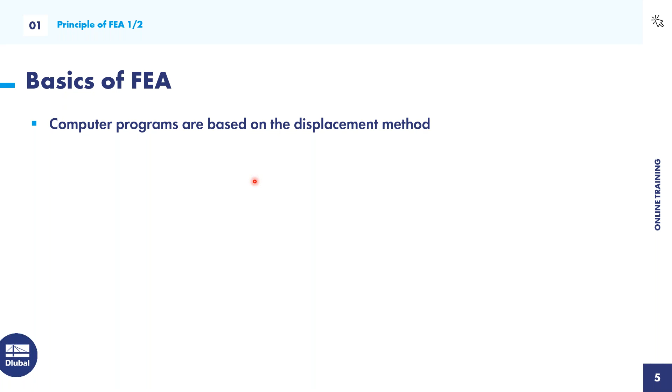But computer programs use the displacement method because it's easier to implement, more convenient, and easier to calculate for the programs.

If you look at any complex structures, it is normal that the analytical solution is not so easy. It's hardly possible to calculate or find any analytical solution. This is also the reason why real structures are decomposed into a mesh of finite interconnected elements.

At each element continuum and at each node, the properties, especially the degrees of freedom like deformation or restraints, are described at the nodes - the properties of the element continuum.

Normally the finite element analysis is just a numerical approximation of an exact solution, so the mechanical behavior is described by approximation sets. The whole process of decomposing a structure into finite elements is called discretization. Remember that, this is very important: discretization is the decomposition of a structure into finite elements.

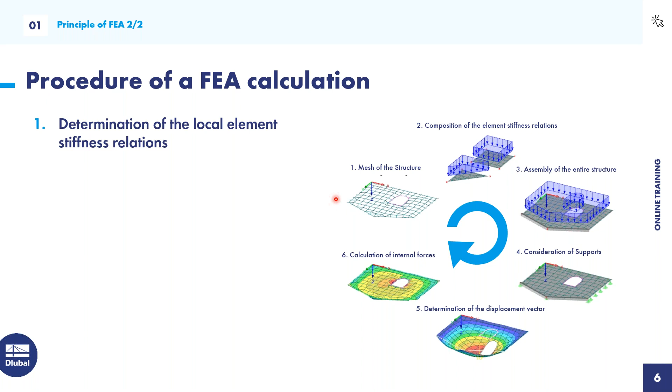So what is the general procedure of an FEA calculation? On the right side, you can see this image with the basic steps. First of all, we do the discretization - we determine the local stiffness relations, the local element stiffness matrices at each node. So we mesh the structure, we do the discretization. Then we transform it to the global coordinate system and assemble the entire structure.

Then we also have to consider different supports in order for the structure to be stable. So the boundary conditions are very important to define, and normally the boundary conditions are the support conditions.

As we said before, the displacement method is the method implemented in computer programs. So first we determine the displacement vector, and after that the internal forces like bending moment, shear forces, normal forces, tensions, stresses, strains, and so on. This is also called the solution of the equation system, and then we do the determination of support forces and internal forces.

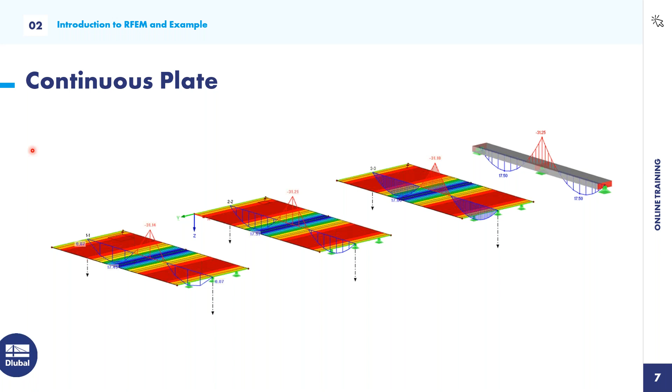Therefore, I have also prepared one question for you, because I want to know how good your knowledge is in using RFEM.

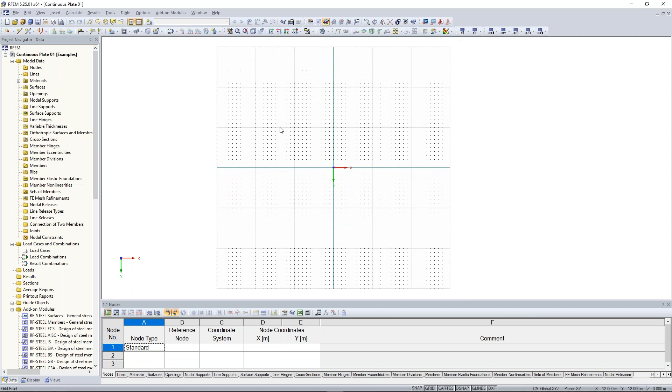Good. So I will explain you now the whole user interface of RFEM. You don't have to do it now with me because I will open another project where I can explain the whole user interface on an already existing project. So just watch and maybe remark some information.

So I will open this one. Fine, very good. I will activate here in the status bar the snap and grid function.

Chronologically, the first step is that we have here the menu bar, and here we have the possibility to do almost every kind of workflow function of RFEM. The basic file, you can save, open, import, export, insert blocks, save it in the project manager, print, and so on. I think this is known from other software applications.

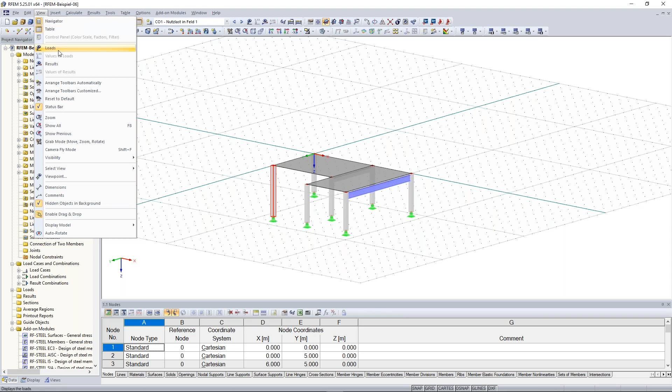Also, you find here additional information concerning the model data, loads, load cases, and combinations. In the view, you can click on loads and the loads will appear, or clicking on results—since we don't have any results at the moment—the program asks if I want to have the results, and I click yes. Now I see also the results, and some other kind of things like comments, dimensions, and so on.

So with this insert tab, you can insert almost every object, from model data to loads, and also to load cases and combinations.

The general step in RFEM is that at first you model all kinds of necessary objects. So you define materials, cross sections, and then you can also model members, hinges, and finally nodal supports. Then you create your load cases and combinations, then your loads, and then you can calculate it. After that you have the possibility to watch the internal forces and the results. This is the basic workflow in RFEM for calculating projects or doing structural analysis.

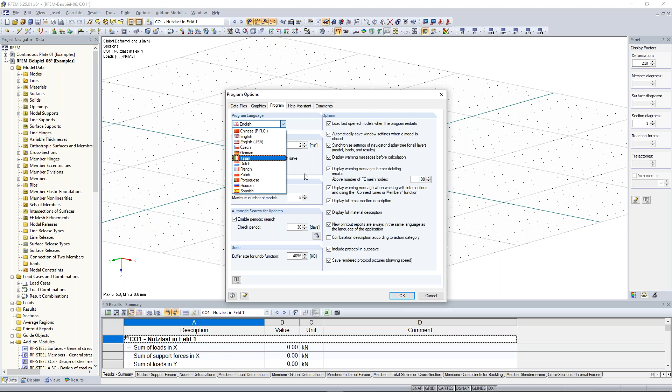You may also notice I use a white background here. For those opening RFEM for the first time, you can change your background. In the options, in the configuration manager, you can change the background to black or white. At the moment I use white, but when I double click on black background, it changes to black. You can also adjust a green or red background—just use the display properties and other colors to adapt your background.

Good. I think that's everything for the menu bar.

Under the menu bar we find the symbol bar. The symbols enable a fast way to insert objects, views, or edits. So if I want to create a new node, I click on new node, click somewhere, and I get new nodes. The same with lines—I click here and then here. I think this is pretty clear.

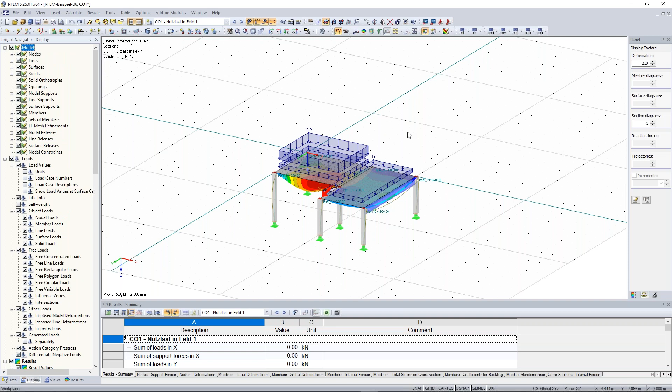Okay, let's jump to the next navigator—this is the display navigator. In this case I have the loads activated at the moment. If I don't want to see them, no problem—just click on loads and all loads disappear. You can do the same on the symbol bar with show loads.

You can also make certain models disappear, like the nodal supports—just click on nodal supports and the supports disappear, but only in visibility. The same goes for results and the FE mesh: when I don't want to see the FE mesh at the moment, I click on that and it's hidden.

Good, so far to the display navigator. Let's continue with the view navigator. Sorry for my bad spelling.

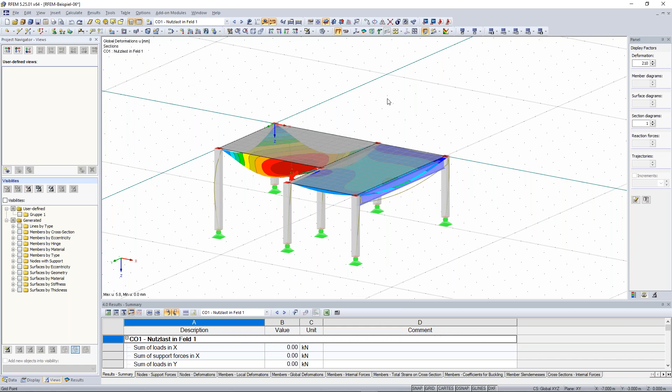So if you like a certain view, for example this one, quite nice, then you can create a user-defined view. Just click here on create new user-defined view, favorite. When you rotate or move away from the model and want your favorite view again, just click on favorite and it jumps back to it. This is a big advantage, especially when working with more detailed or complex structures or projects. Then you can use these user-defined views.

Also with the help of visibilities, you can filter things better. For example, I just want to see all cross sections here of this concrete. No problem. Go to members by cross section, open this tree, and activate the rectangle 300 by 300. Only this kind of cross section is visible and also possible to modify.

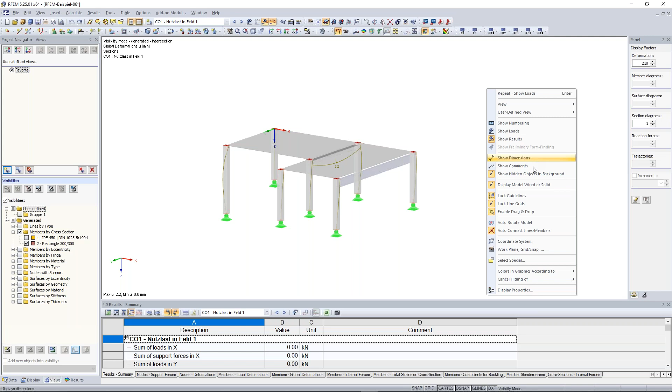You can also right click and this menu appears, then click here on display model, show hidden objects in the background, so the surfaces here will disappear and it will look like that.

Undoing this visibility mode, you can click here on visibility by select objects, click on the arrow, and then cancel visibility mode. You can do the same thing here too.

Now the last navigator, this is the result navigator. Here I can see results like deformations, stresses, internal forces of members, and also support reactions. At the moment I see the global deformation of the whole structure, both from the members and from the surfaces.

If I just want to look at the members, I click here on members and choose the right internal force. In this case I choose the normal force, and there I can see the compression forces in the concrete columns.

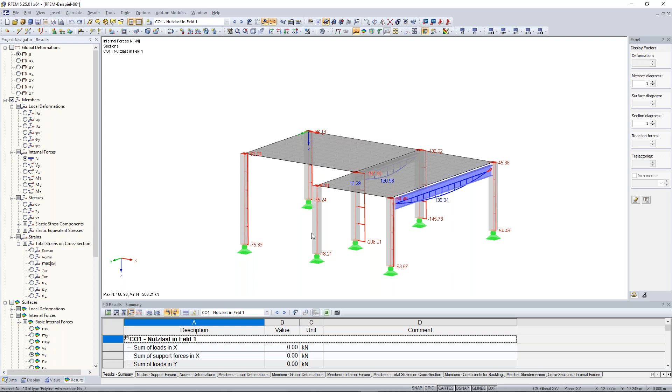Also here, surfaces, internal forces of the surface, mx, my, and so on. And also the support reactions with the components px, py, pz, and so on.

Yeah, good, so much to the navigator. Now...

On the bottom of our user interface we have the tables. With the tables we have the possibility to view all information, and also to insert and create new information or objects. For example, I can create here a new node.

So I click here on standard. Reference node is my node here, and I enter the coordinates. x is 14, y is 0, and z is 3. And I see here this created node.

This is also possible for almost all other kinds of objects like lines, materials, surfaces, solids, and so on. You can jump to the next tables by clicking the next icons. Now I am at the load cases, nodal loads, or also member loads, line loads, surface loads, results, and so on.

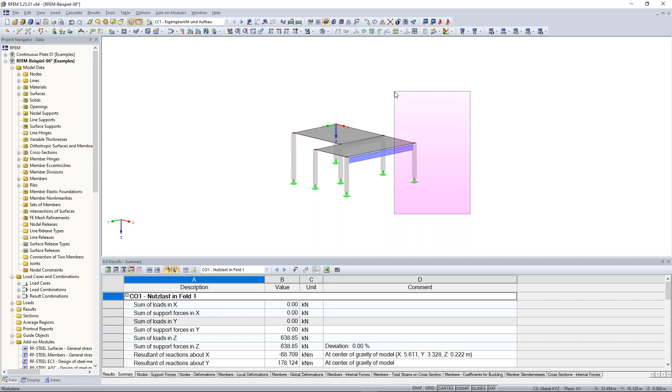Otherwise, when you draw the selection window from the right to the left corner, then everything is selected which is surrounded by this selection window. So in this case it would be the column on the right side, but also the steel girder and the concrete surface. This is important to know.

And with the mouse wheel you can also zoom in and zoom out, I think this is clear. When you press the control key on your keyboard and also press the mouse wheel, then you can rotate this structure. When you press the shift key and also the mouse wheel, then you can zoom in and out.

We offer these possibilities also with this icon here in the icon bar: move, zoom, rotate, and so on. There you have the same possibilities, and so on.

Good, I think this was everything. Bastian, have I forgotten something, or do you want to add something? I think you haven't forgotten anything, and there are also no questions, so I think you can move on.

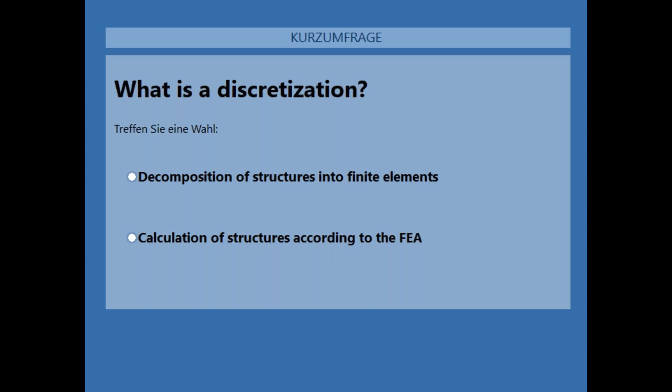Good, most of you have already answered this question, and most of you paid attention to that chapter concerning the general basics of FEA. So, discretization, what is that? It's a decomposition of structures into finite elements.

Very, very good. So let's start our example. Jump back to the continuous plate. Let's start modeling it.

First of all, I create a new surface. In the symbol bar, I find this icon, new rectangular surface. By clicking on the arrow, I find also other kinds of surfaces, but for me it's good to use this rectangle one. I click on that, and a new window opens.

The next thing I'm gonna do is create the material. In this case, I use the Eurocode concrete C30/37 material. For those who don't have this material here, no problem — edit the material by clicking this icon here, and open the material library.

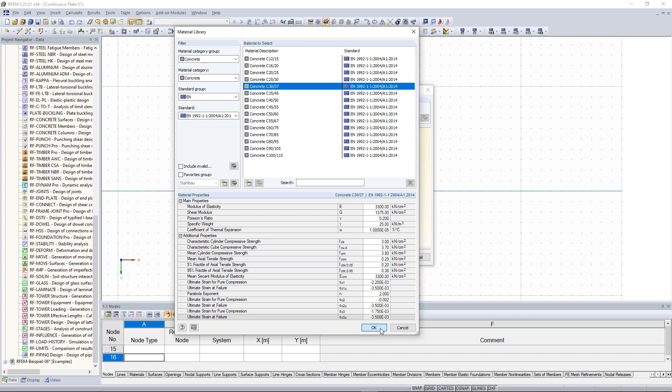I click on OK. Important note is that we set the Poisson's ratio to 0, because we want to get, for that example, results which should be constant over the whole plate thickness — so no shear deformation in the plate thickness. I click on OK.

And the thickness of our concrete surface is 300 millimeters. So I click on OK.

Now I draw and activate here the snap function. I draw this rectangle from my local global coordinate system, 10 meters to the right side and 5 meters high. Good, now right click, and I close this way of inserting a new surface.

So now I see here the rectangular surface, and now I can copy it or create a new one. Now one tip, please remember this, it helps me a lot: by clicking the enter or return key on your keyboard, you do the same task again.

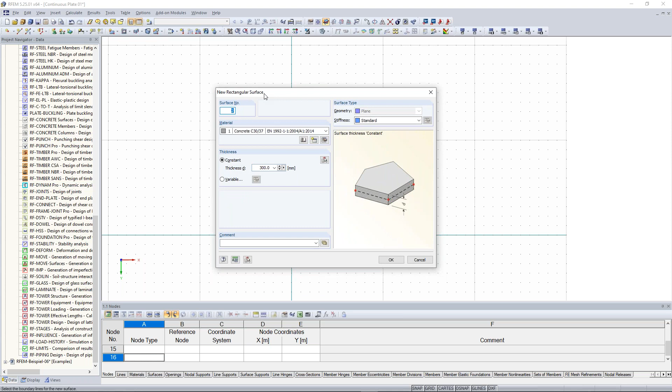So our task was the creation of this new rectangular surface. When I click the return key or the enter key, it opens this new rectangular surface window again, and I click on OK again, creating the same surface again with the same geometry.

And now I do it again here, at a distance of 5 meters from the right upper corner node, and we move this 10 meters downwards. So I select all 3 plates, snap here near this middle surface, near the left bottom corner, and move this to my global coordinate system.

To get better results, it is useful to use the same thickness of the plate and also refer it on a 1 meter beam. So we create here a new cross section for the member start.

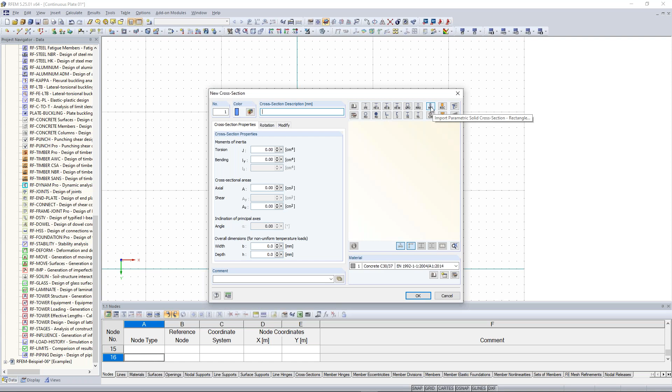I click here the import parametric solid cross section, a rectangle. The width of my cross section is 1000 millimeters, and the height is the same as the thickness of my plate, 300 millimeters. The material is the same, concrete C30/37.

I click on OK, and it looks like that. Here I get the cross-section description, also with the cross-section properties, like the moments of inertia, bending, torsion, and so on. I click on OK.

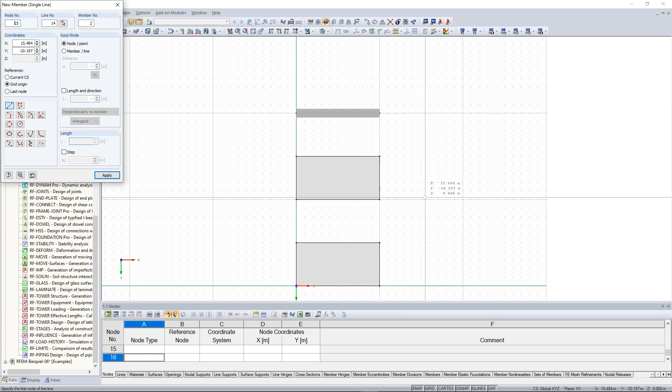And now the member start has the cross-section of this one, and the member end also has the same. I click on OK, and now I draw it from left to the right, also 10 meters long, and close it with a right click.

Now I can rotate it a little bit, and now I can see it from a 3D perspective.

So the next thing is we want to have a continuous beam and also continuous plate. Therefore, I have to create lines in the middle and also nodes here in order to create supports afterwards. So how can we do that?

We can divide this line into 2 lines, and then we get the middle node. And then with reference to the middle node, we can create the next line perpendicular to the other end.

So you can also see here the line, the red line, and also here the arrow. The arrow shows from the left to the right side, and this symbolizes that the starting node is on the left side and the end node on the right side.

With right click on one of the line nodes, I can also show the local axis system, and this is similar to the line direction. So the local x-axis of every line or every member is the same as the line direction. You see it points to the same direction, to the right.

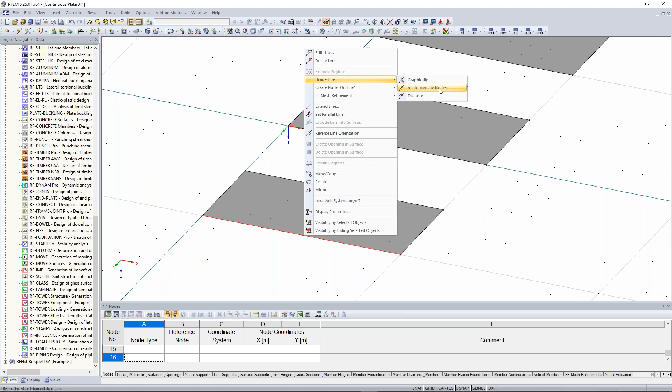I click here on polyline with a right click, and I click on divide line. I just want to have a middle node, so I can divide it into n intermediate nodes. When I click here 1, it will be divided into 2 parts. When I enter 2, into 3 parts, 3 into 4 parts, and so on.

So I click on 1, and I see this node, and these 2 lines are divided. Next thing is that we create this line perpendicular to the next one.

So click here on new line and draw this line from there to there, and double right click, and we can close this.

Now it comes to my favorite way of creation of objects, and this is the copy via drag and drop. We can easily copy this line by drag and drop.

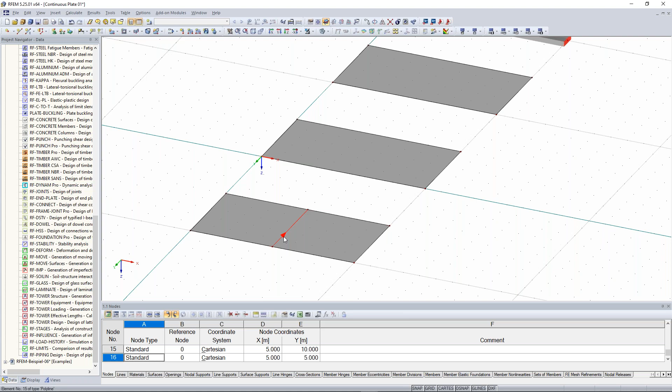Just click on that line, press the Control key on your keyboard, and now the left mouse, click and hold and put it to the other surface. And we do the same thing for the other one.

Good. Now let's divide this member here. Press right click, divide member. Now you can do it by distance or graphically. I decide to do it by distance.

And now it's also interesting how we can do that. We want to divide it exactly in the middle. So we can choose 50% as relation, or the absolute value, and it will start from the member start or from the member end.

And now here you can see the arrow, and this arrow shows from the left to the right side. And when I want to have a division 3 meters from the start, I have to enter 3 meters, and the member end will be calculated automatically.

The same thing with member end. If I want to go from the right side, so from the member end, press 6 meters, the member start will be resulted automatically. But in our case, 50%, because we want to divide it exactly in the middle.

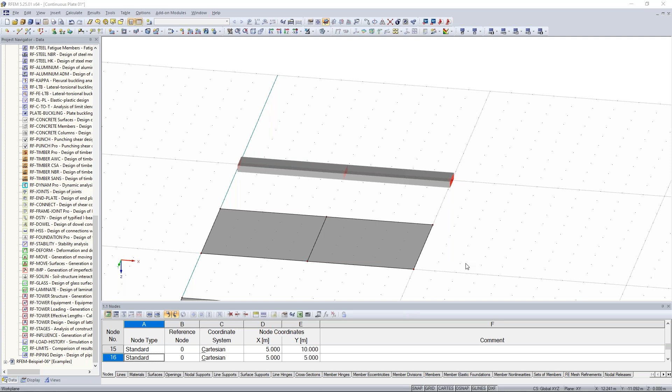I think what you can do is show us again how you can edit the cross section, for example, of the beam, and yeah, guess that would be nice to see again.

Okay, of course. So there are different ways to do it. You can do it with the help of the data navigator. Here you have the cross sections. Open this cross section, and by right click on this rectangle, you can edit this cross section.

Or if you want to create a complete new one, no problem. Just click on any other cross sections, like for example IPE profile, choose one of the IPE profiles, and click OK, and you'll have a new cross section. Yeah, this is one way of doing this.

Or you choose here the whole member by selecting this. Click right click, member, and edit. Then you can modify your member by editing the cross section for the member start, or create a new one. It's the same procedure like here with the data navigator.

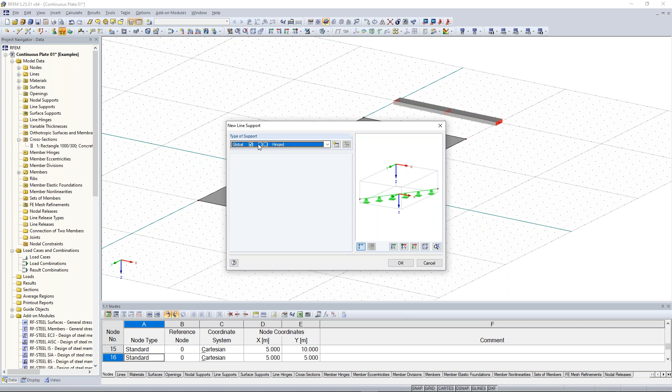Good, I would continue. Now let's do some supports. It's very easy. We have line supports for surfaces and lines, and also nodal supports like for this kind of members. So we create now line supports. We choose here this hinged support. I click on OK.

Now I draw, and this is the big advantage of RFEM: I can choose and select several objects at once. So I rotate my interface a little bit, and now I draw a selection window from the right to the left side in order to get all three middle lines here. And I do the same thing with the other surfaces.

Good, now let's come to the member. Here we do two different kinds of nodal supports. The first one is a new type of nodal support. So I click on new type of nodal support, and now let's look at this definition of support conditions.

So if I activate or check one condition, like UZ, then I deactivate the deformation of UZ, so no deformation in this direction is possible. Therefore there will be some forces, and the same also with restraints.

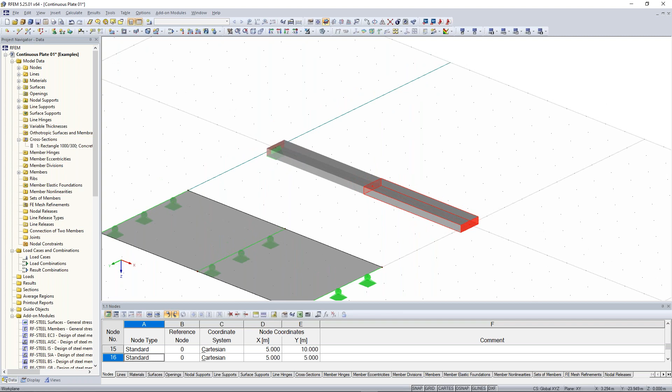Good. Now click on OK. Draw a selection window for just the first node on the left side. And for the other two nodes, you can draw also a selection window. It's no problem that the member is also selected, because we want to create an object just for nodes, and the program recognizes it.

So click here on New Nodal Support, and now we can choose the normal hinged support. Because we have already selected the nodes, the nodes appear here also in this box. Click on OK, and the two supports were created.

Now, the next step is the creation of loads. Before we add some loads, we have to create load cases. Click here on New Load Case in the symbol bar. You can also do it here: load cases, combinations, new load case. Same procedure—as you can see, we have more possibilities to insert or create something. So, new load case.

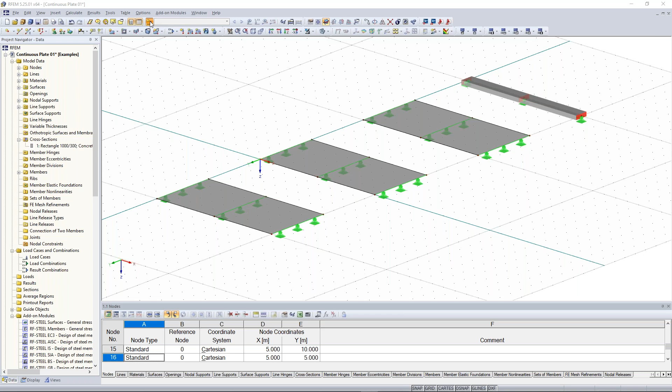For our simple example, we insert the name or description 'test load' and deactivate the self-weight, in order to compare the results better. Then I click OK.

And I will create surface loads here and member loads here. So again, new surface load here in the symbol bar. Here I can set up some load types, load direction, uniform load distribution, linear in X, linear in Y, and so on.

I add here the magnitude of 10 kilonewton per square meter. Maybe the load direction is greyed out, because we use the model type 2D, so there we have some restrictions concerning the load direction. I click OK, and I add the loads on the surfaces.

Good, and now let's do the same for the continuous member. One big mistake, especially for RFEM beginners, is to also use line loads for members. But we have to use member loads for members. Line loads are used for additional loads on lines.

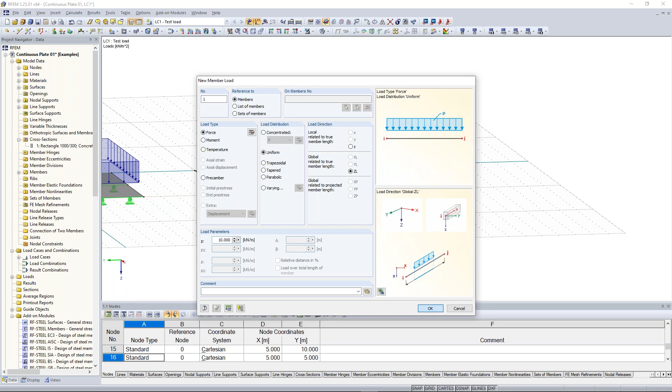Yeah, that for members I use member loads. So I click here on member loads, enter the same load parameter, 10 kilonewton per meter. Click on OK, and I choose both members.

Good. And the display of the member load, I can do it a little bit smaller, so I decrease the size here. So now it looks good. Nice.

So the next part is the creation of the refinement, so every surface gets a different mesh size. In order to do that, I create here FE mesh refinements. Normally, the whole settings of the FE meshes are managed here at the Calculate tab under FE mesh settings.

Here you set the general target length of the finite elements. If I would do nothing, every surface would get a finite element length of 0.5 meter. But in this case, I want to have for every surface another one. So I do here FE mesh refinement, right click, new FE mesh refinement.

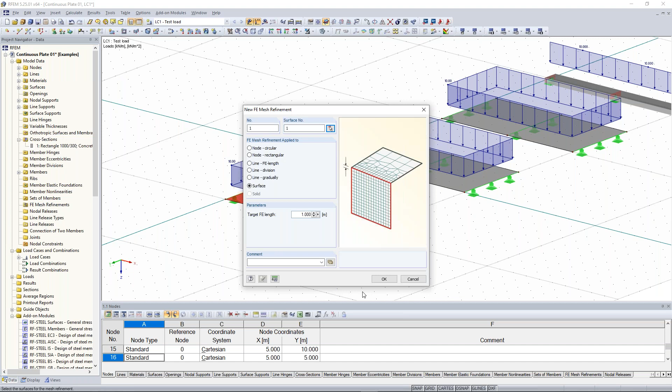Now let's do the same thing again. Right click here in the data navigator, new FE mesh refinement, 0.5 here at the target FE length, and the surface is this one. I click on OK, on OK again.

And now here we do a different way of insert. Right click, FE mesh refinement, new. Because we have already selected it, it shows me here that we have this third surface. We create a new FE mesh refinement, 0.1. Here we see the FE mesh refinement with this quadratic object symbol.

Yeah, and now I would suppose that we calculate it. And before we do it, in order to compare the results better to each other, it would be quite helpful if we have sections here at the surfaces. In order to do that, here in the data navigator, we have also the possibility to create sections.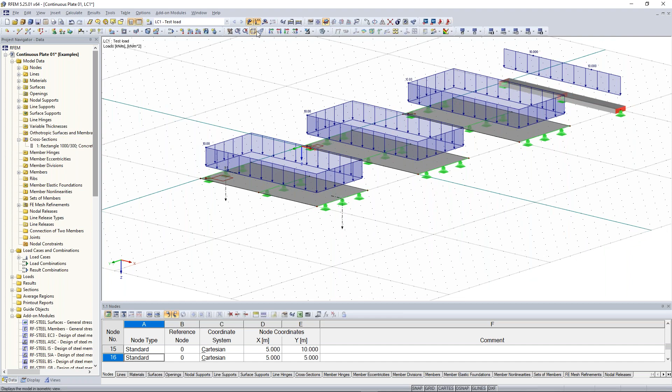Maybe I can make the loads disappear here by clicking not to show the loads. And now also one of my favorite ways of creating things in RFEM is drag and drop.

So press Ctrl key, left mouse click, and copy it from one side to the other, so from one surface to the other surface.

So, modify or edit here the section name and choose here the correct surface. And let's do here this thing again, choose here also the correct surface, and click on OK.

Good, now I think we have everything we need for our calculation. The next thing is starting the calculation.

Therefore, you can use here calculate all in the symbol bar, or also here calculate RFEM results only, or to calculate, and there you can choose your load case or your load combinations and so on. The topic of defining load combinations and so on will be part of the next chapters, the next parts of our student series of online training. So I click here on calculate all.

And the first thing we're going to see are the deformations. So here the deformation, and also a very nice thing is when I change here the display model to the wireframe display model, I see here also the size of the FE meshes. As we said before, here in this first surface, we have a FE mesh size of 1 meter, 0.5, and 0.1.

Good. In order to see the results here at the beam, we have to activate members, and we see here the bending moments: field moment, support moment, also the shear forces and so on. But I think this is clear.

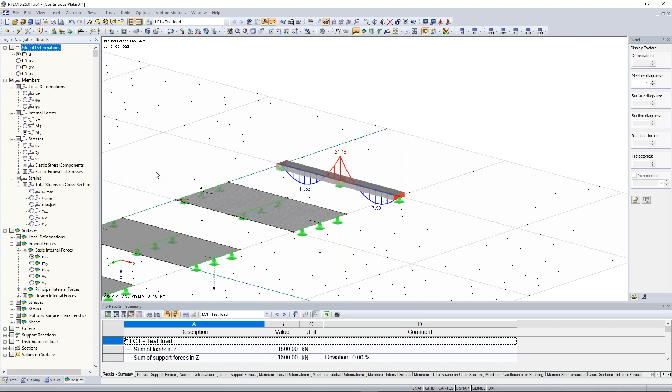More interesting are maybe the sections of the surfaces in order to see the bending moments of the surfaces. Therefore, I activate here in the result navigator sections, and I want to see the bending moments. So I have to activate here surfaces and choose here MX.

One hint to the basic internal forces of these surfaces. You can see here also the local axis of every surface.

At the moment, I deactivate the results just to show what I want to explain. Here we see the local axis of this surface, the x-axis and the y-axis. The x-axis points to the global x-axis, and the local y-axis also to the global y-axis there.

So now, important point: the basic internal forces like MX and MY are oriented in the same direction here. MX is along the local x-axis of this surface, and the same for MY.

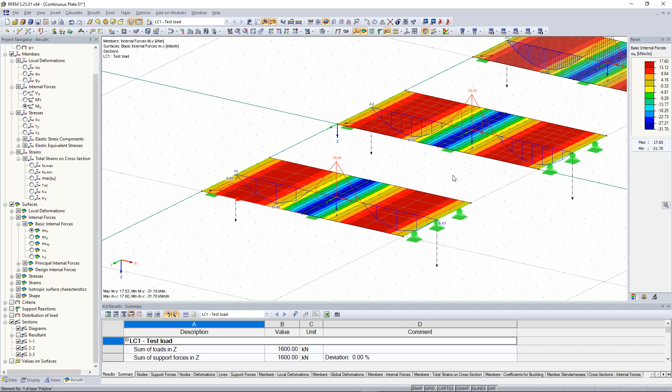Good. So let's watch the results together. Here we can see the results are pretty okay, especially this one with the fine mesh. There we have the same support moment like here with this member. This looks pretty good.

In general, the results are quite good, especially the extreme results, like here the field and the support moment.

But now this will be very important: the length of this FE mesh. Here you see it's linear, and normally it's everywhere linear, but here we have in 1 meter just one FE element, and here we have 10 FE elements in 1 meter.

So the approximation of the results will be very incorrect here, I would say, or not really exact, and here it's more exact. You see it at the distribution of the moment section. It isn't really exact in comparison to the one where we have really fine FE mesh sizes.

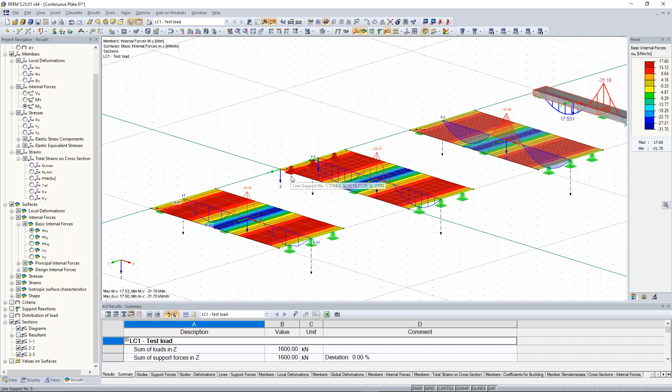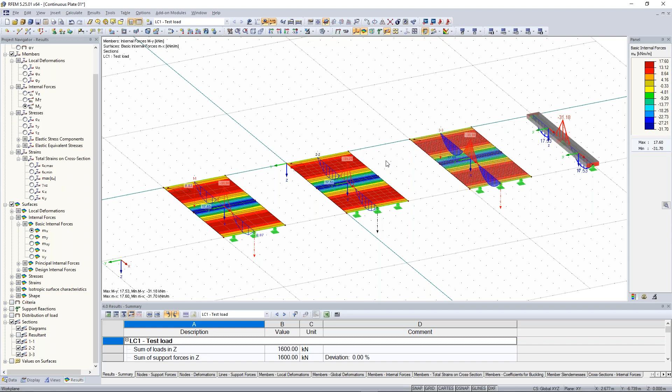So you have to know it. I would suggest you make that FE mesh quite fine, but not too fine, because when you have too fine FE meshes, then the calculation will take very long. So you have to find the right proportion, the right FE mesh sizes, in order to have correct and exact values, but also consider the long calculation time of FE programs.

Now I see one question, and this question is: what is the suggested FE mesh size? I would recommend at least 4 up to 6 or 8 FE meshes in one surface.

So we have here from there to there, it's 5 meters. At least there should be, from one boundary condition to the other boundary condition, 5 up to 6 meshes, finite elements. So I would say this one is quite good, this one with the mesh size 0.5 meters. This one is very fine, and it is not so important to have such a fine FE mesh.

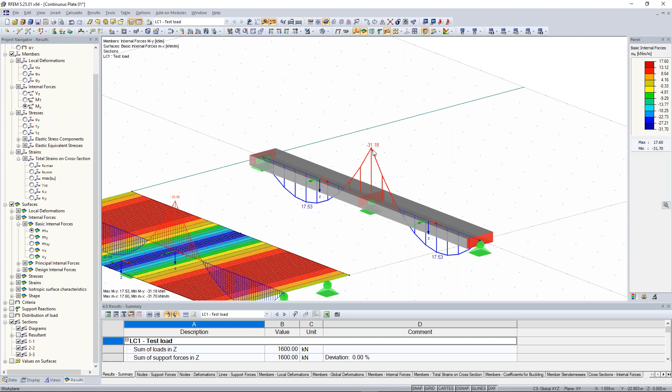Normally in your studies, you do hand calculations, which is pretty common, using tables or calculators. When you calculate the support moment of a two-field beam or continuous beam, you might get different values. Let's watch the results again. Normally you would get a support moment of 31.25 kilonewton meters, but in this case, just 31.18.

Why? It's due to the shear activation of members. So I go here to calculation parameters, and here you see the activation of shear stiffness of members. If I activate it, it considers additional shear forces and therefore also additional deformation, and you calculate it as not as stiff. In Germany, we would say schubweich. So with the activation of these cross-sectional areas AY and AZ, additional areas of cross-section.

This will be very interesting for the next chapter, because I have also prepared a PowerPoint for that. So I jump back to my PowerPoint.

Now I want to take a look at the plate theory. First of all, we try to relate it to the beam element. On one side we have the Bernoulli beam, on the other the Timoshenko beam. The Bernoulli beam says the cross-section remains plane and also remains perpendicular to the member axis, and we don't consider any shear deformation, so we have rigid shear stiffness. When you calculate something in your studies with tables, you calculate a Bernoulli beam.

But what is in most cases implemented in FEA programs is the Timoshenko beam, or also the other plate theory. But first let's take a look at the Timoshenko beam.

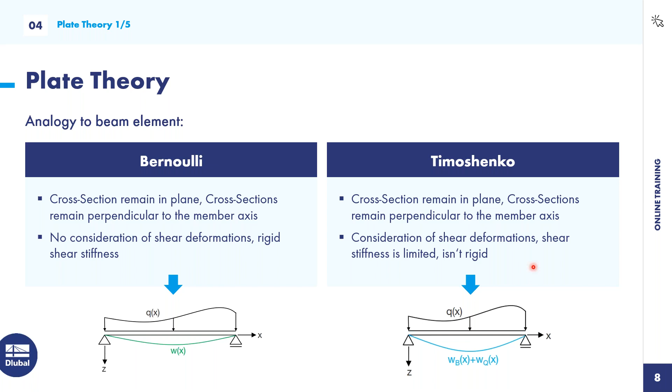The first condition is the same: the cross-section remains in plane and also remains perpendicular to the member axis. But here we consider shear deformations, so the shear stiffness is limited and not rigid anymore. Here it remains perpendicular to the axis, but we get an additional angle, so it won't be perpendicular anymore to the member axis. So additional deformation in this Timoshenko theory.

Now let's transfer the beam theory to the plate theory. The Bernoulli beam corresponds in plate theory to the Kirchhoff theory, and the Timoshenko beam to the Reissner-Mindlin theory. What are the conditions? We have a geometrically linear system, so small deformation, Hooke's law, cross-section remains flat with no warping, and also constant thickness, and we don't consider any shear deformations.

For Reissner-Mindlin, the four conditions are the same, but we consider shear deformations and also the transverse and lateral strain. What is that last one? When I take this kind of beam and tie it with a force, it will get a little bit longer. The part where it gets longer is called delta L, and also the cross-section becomes a little bit smaller. This effect is called the transverse or lateral strain. In German, we would say Querdehnungseffekt.

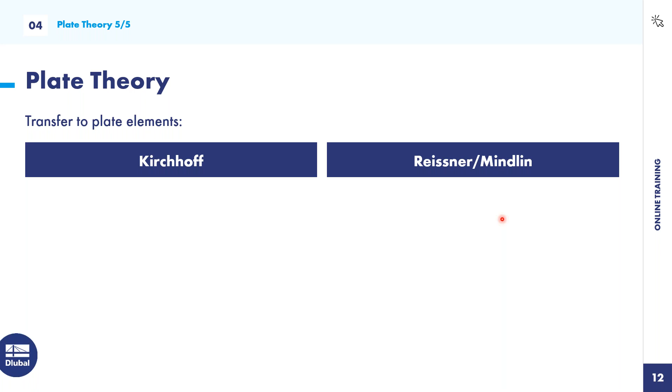So again, as a summary: Kirchhoff on the left side, Reissner-Mindlin on the right side. Kirchhoff is the same as the Bernoulli beam, and Reissner-Mindlin the same as the Timoshenko beam. At Kirchhoff, we don't consider any kind of shear deformations, and at Reissner-Mindlin, we consider shear deformations.

So what can we use Kirchhoff for? We can use Kirchhoff for the theory of thin plates, like normal concrete surfaces in story buildings or something like that. There we can get quite good results with the Kirchhoff theory. It's a simplified approach.

The Reissner-Mindlin theory, where we consider shear deformation, can be used for thick plates as well as thin plates. When you calculate according to Reissner-Mindlin, you get quite good results for both thin and thick plates, because it's a higher-value approach and we get more accurate shear forces. So my recommendation is please use Reissner-Mindlin, because then you get quite good results for almost every application area.

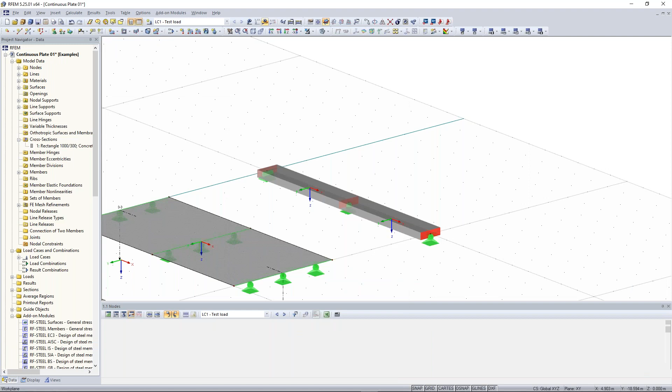I recalculate it, and I will get the support moment of my two-field beam of 31.25. This will also be the same when I calculate it according to tables, or when I do this by the force method or by hand. So keep that in mind.

Okay, Bastian, are there any questions? I don't think you missed something, we have no unanswered questions. So, well, feel free to ask. Oh wait, there's a new one. But I think it's better if I answer this by my own, because this doesn't have that much to do with the online training right now.

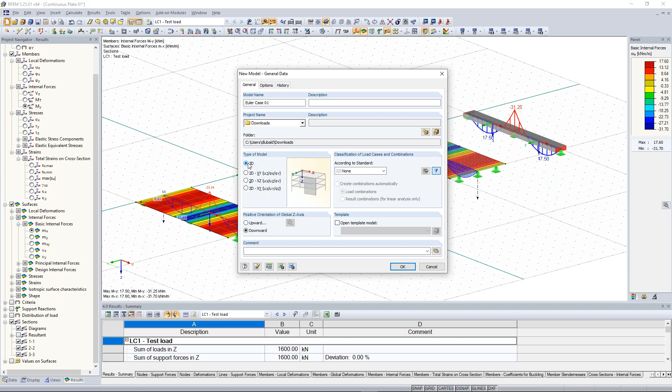Okay, so let's go ahead. I create a new file, a new model here in RFEM. In this case, I insert here Euler case 01, save it under downloads, and very important now, I want to consider a 3D model, because we do a stability analysis of this Euler beam, and there I want to consider both buckling directions. So therefore 3D, I click on OK.

What we're gonna do now is create this column. Therefore, click here on new single member. Click on create new cross section for member start. And we choose here a steel profile, what is very common in Germany, HEB 300. So I click here on import rolled cross section HEB, or when I can't find it here, you can also import cross section from the library.

Click here on I sections, and choose here this HEB. So what are HEBs? These are wide I-beams with parallel flanges. And we choose here this HEB 300.

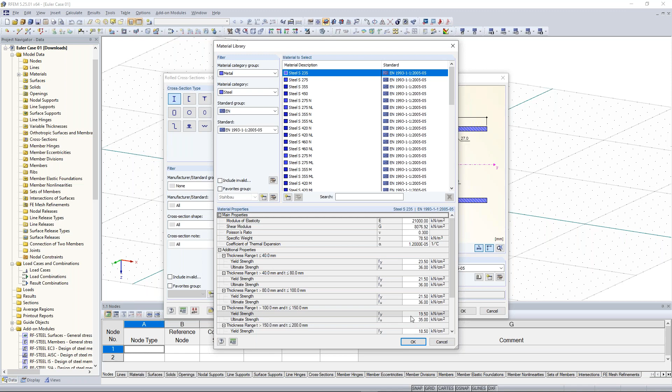Material is steel S235. We can also edit this material. I choose here this steel material according to the Eurocode. You can also import some material from the material library. Steel S235 because of this yield strength of 23.5 kilonewton per square centimeter. I click on OK.

Again, and now I want to create this column, and this is also maybe one of the mistakes when I want to create a column and I'm not in the correct work plane, that I can't model it into the height. Yeah, it doesn't work because I am here in this work plane.

Two possibilities: I change the work plane, for example in XZ, and then I draw it 10 meters high. Or if I want to stay in the same work plane like before in the XY, I have also the possibility that I create this beam with the help of the length and direction. And now I say, okay, perpendicularly to the work plane, 10 meters high, and the opposite of the global Z direction, and I have the same result as the left beam.

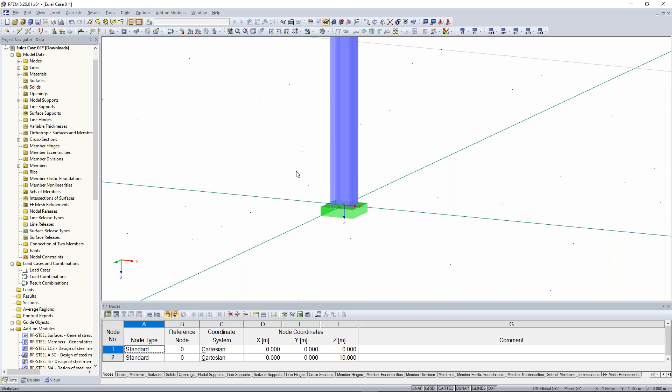Good. Now this was everything concerning the creation of modeling. Now we create a new load case. Load case will be test load. And we don't consider the self weight again. I click on OK.

Now we create a new nodal force on that node here. Therefore, we click here on new nodal load, you find it here at the symbol bar. This nodal load refers to the global coordinate system. I put here a horizontal force in the global x-axis of 10 kilonewton and vertical force 100 kilonewton. I click on OK and select the head node here.

Good. Now let's calculate this thing. Show results or calculate all, doesn't matter. And what we're gonna see now is the deformation. In this case, the deformation is shown as 63.5 millimeters, and we can show the deformation a little bit nicer.

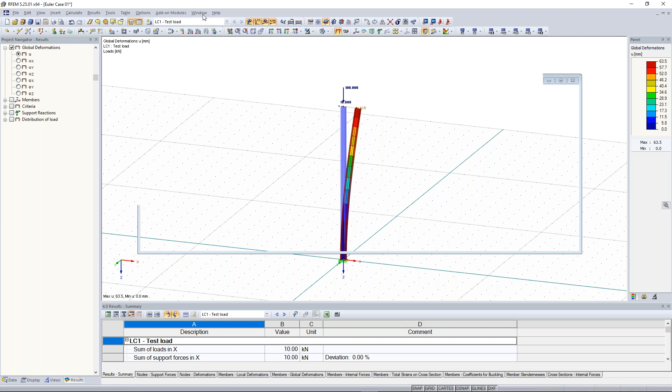I will create 3 windows in order to show you the results of this column a little bit better. So I click here, new window. Again on a new window, and show the results in 3 windows. I change maybe the view in the opposite of the y direction.

So what we're gonna do now is go to Calculate in the menu bar, and go to the calculation parameters, and go to the register Load Cases. There we have our load case, test load. Normally the load cases in RFEM are preset with the theory of first order, so we have a geometrically linear analysis.

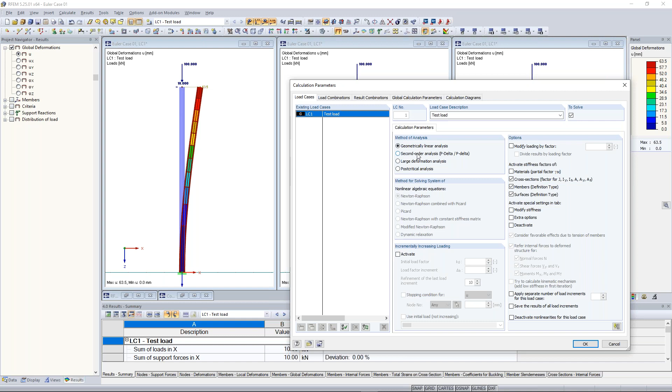Now we're gonna do a nonlinear geometrical analysis. So we choose here the second order analysis, P-delta. I think especially the American guys know this as P-delta. I click here on second order, and I calculate it. So let's calculate it.

And maybe you see also here the deformation - they are a little bit different, but this is not the main point. I take a look to the bending moment, especially at the bottom. There we have 106.87 kilonewton meters. Normally, we have a length of 10 meters, a horizontal force of 10 kilonewton, 10 multiplied by the lever arm of 10 meters is 100 kilonewton meters at the bottom as internal bending moment.

So you don't have to do it again, I will show you the internal forces again at the analysis of a geometrical linear analysis, so theory first order - here 100 kilonewton meters. Now again with theory second order, and now we get an additional 6 kilonewton meters.

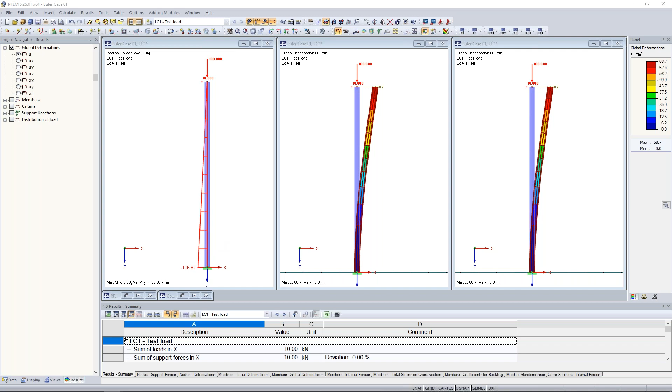So far to the different calculation methods. Good, now let's come to the stability analysis. And this is also very important, especially when you are dealing with steel structures - there you will need it.

So first of all, I will create only a vertical force, so I will delete here this horizontal component. I will show the grid again. And for stability analysis, in order to get the buckling or the eigenforms or the critical load factors or the critical loads, critical lengths, you have to use one of our add-on modules, and this is RF-Stability.

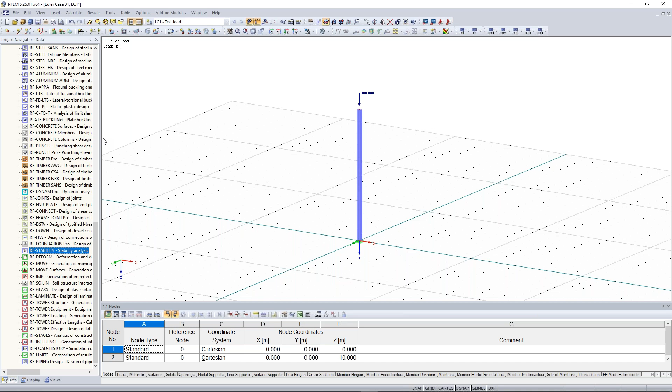You find RF-Stability here in the data navigator - scroll down, here you will find it, RF-Stability. Or you find this also here in the menu bar, Add-on Modules, Stability, RF-Stability. So this new window will open, and this is what you can do with RF-Stability.

With RF-Stability, you can do any stability analysis by the eigenvalue method. So you can calculate eigenforms, buckling forms. You can get the critical lengths, critical forces, critical loads, and so on. And this is very good in order to detect maybe some weaknesses of your structure, or to detect some critical points and so on.

Therefore, it's very good. And now let's do the typical Euler case number 1. In the study, I think you have already learned how the first eigenform or the critical buckling of one Euler case looks like. Let's do the same here in RF-Stability. So first of all, number of lowest eigenvalues.

In this case, the Euler case 1, there are only 2 cases important, so I choose here 2. We have the buckling around the weak axis and the buckling around the strong axis. We choose here load case 1. We don't need to consider favorable effects due to tension, and also no prestress for cable and membranes. But I would activate the division of straight members and set the minimum number of member divisions to 10.

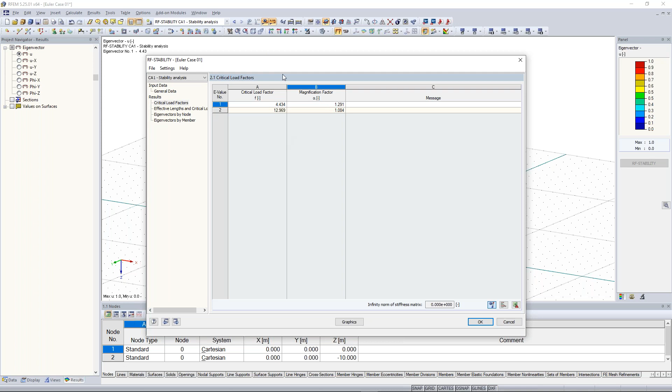Okay, now again, as a summary: the critical load factor says, with which factor I have to multiply my system, so my loads, in order to get an unstable system. So if I multiply the 100 kilonewton vertical force with 4.43, then I will get a critical load of 440 kilonewton, and then my system becomes unstable.

So let's watch the eigenforms graphics. The first eigenform of this column is the buckling around the weak axis. You can see it here. The weak axis is the z-axis. So around the weak z-axis, my system is buckling - this is the first eigenform.

Now the next eigenform is around the y-axis, because the y-axis is the much stronger axis. I think this is pretty clear. Because the strong y-axis can resist more loads, the critical load factor is higher, and also the critical load is higher.

Good, now let's see what happens when I increase the load from 100 kilonewton to 443 - still under my critical load. Let's calculate all, because when I also have an add-on module open, I have to click calculate all, in order to get results from every load case and every add-on module.

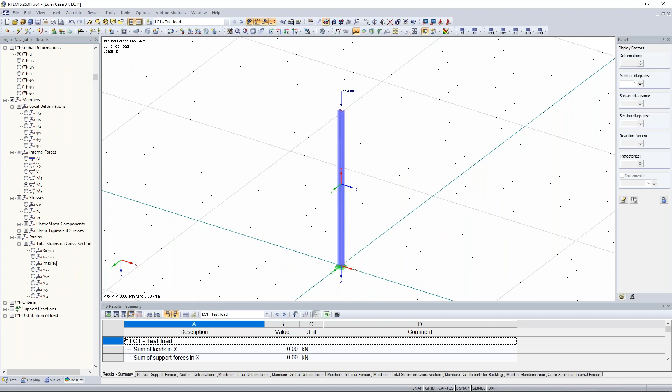Good, okay, RF Stability, now we can see it. The critical load factor is exactly 1. This means that the system, with that load of 443 kilonewton, is almost unstable.

Now let's see what happens when I increase the load to more than 443, to 444. Now we get the result, a calculation error: the stiffness matrix is singular, the model is unstable. And this is the reason - the model is unstable because of that too high load. So in this case, my system is unstable, the stiffness matrix is singular.

For that, we have a very good FAQ. Bastia, maybe you could put the FAQ in the chat, and this FAQ will help you find maybe the problems or the critical locations why your model is unstable, especially at the beginning of modeling with RFEM. It can be possible that you find these problems.

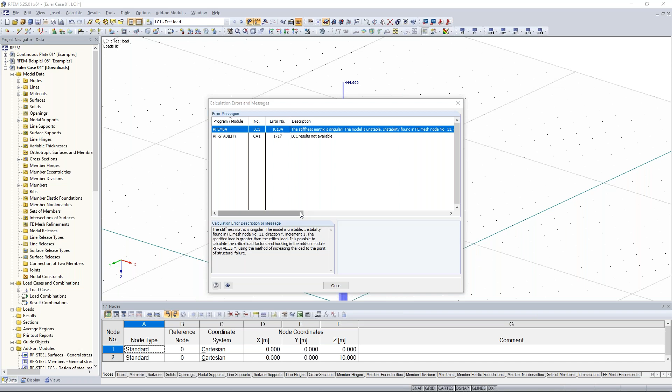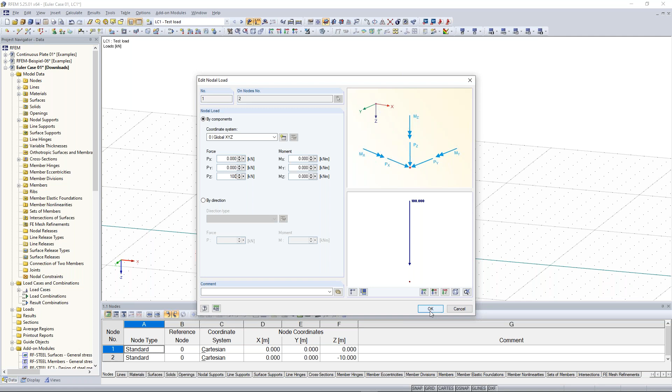A big advantage now in RFEM is that we can easily copy something. I select the whole column, right click, and say move and copy. Now it's important when I want to copy something that I put here a number higher than 0. And the displacement vector is 10 meters. I can put here 10 meters as a number, or I can also select 2 points in order to get the displacement vector. In this case, I choose this length and this length. It's the same.

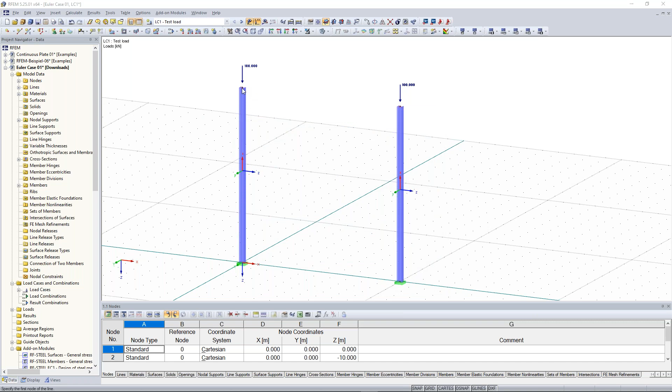Good. Now I need a girder for the frame, and therefore I create a new cross section. In this case, also a new single member. I click here in the symbol bar, new single member, and create a new cross section for the member start. In this case, I choose the IPE 300 profile. I can also enter this in the cross section description. Material remains steel. Click on OK and draw it from the left column to the right column.

Okay, good. Now I want to change the height of this frame. Therefore, I select both nodes, right click on the member - doesn't matter, member or nodes - and then I can choose the nodes and say, okay, I want to edit it. And because they have the same coordinates, I can modify the Z coordinate. I choose here -6.

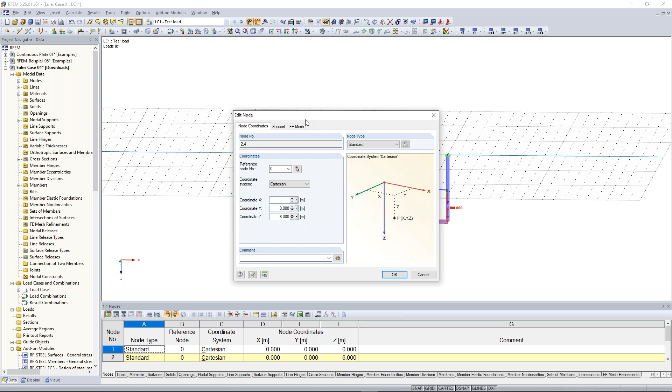So what was the mistake? The mistake was that I also deleted the minus, and now the system was orientated according to the global z-axis, and my global z-axis is located downwards. Therefore, the coordinate z plus 6 goes in this direction. But I want it like that, -6. No problem, you can change it afterwards very easily.

Good. Now the same thing again, let's do the stability analysis. Therefore, click here on RF stability again. And now we show a little bit more eigenvalues, 6 for example. Calculate it.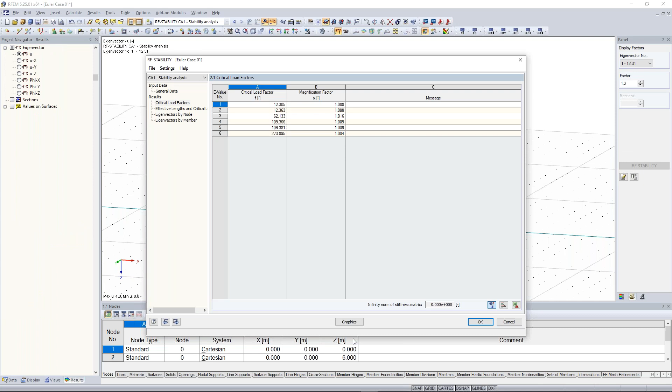And now let's watch the eigenvectors. We can see that we have a deformation out of the plane. Normally this isn't so good for frame structures or for steel halls, and we try to prevent these situations. Jump to the next eigenvector. Here the same - we have deformation out of the plane, so the eigenform shows out of the plane globally, for the whole system.

The third eigenvector is that eigenform that we know maybe also when we have eigenforms in plane. And maybe also watch the other one - this is also out of the plane.

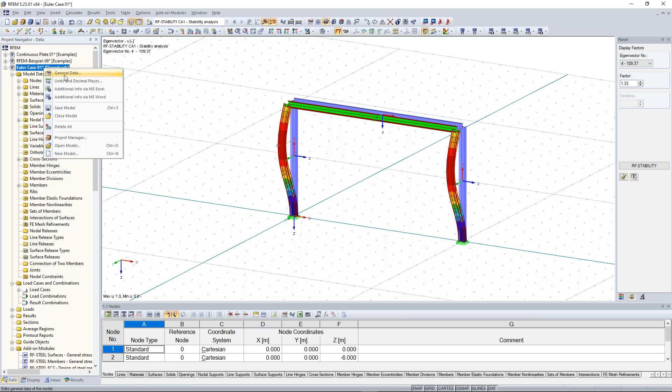How can we prevent this failure out of the plane? There are two possibilities. When I want to calculate it just 2D, I can assure that buckling out of the plane isn't possible. Then I just change here at the general data - right click, general data - the type of model to 2D, XZ. Let's do it.

Calculate RF stability again. And now let's watch the first eigenvalue, and this is this one. When I switch to the other ones, only in the plane, and so on.

So, but how can I prevent this when I have a 3D model? Because normally structures are in 3D. So, general data, 3D again. I can add here additional supports who carry loads from the global y direction.

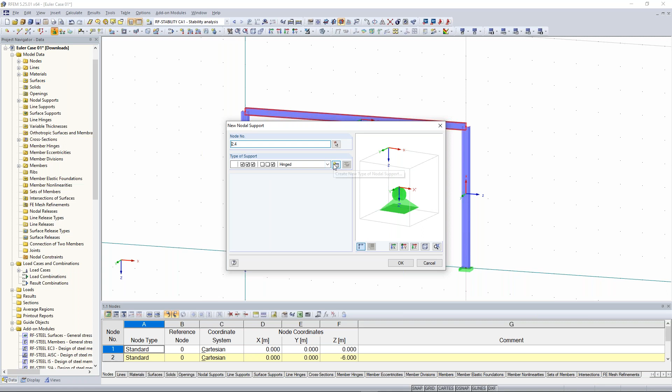So I select here the upper nodes, create a new nodal support, and now I want that this nodal support carries only forces in the global y direction. Therefore, create a new type of nodal support. I activate the deformation in this direction, and in this case it's UY. I click on OK, and let's see what's gonna happen if we have the same cases.

Again, the first eigenvalue is here, this one. Next one is this one. This is out of the plane, but only the column, not the upper girder here. And this is important to know. So this is more a local failure. This is a global failure. Okay, this is important to know.

Good, I have forgotten one thing, honestly. I'm sorry about that. It's possible when you take a look to the effective lengths that you can use them also for stability analysis for this steel design, for example. And when you calculate this with your hand calculation and compare the results, it can be possible that your effective length calculated by hand and the result by this program can differentiate. They can be different. This is because of the activation of the shear stiffnesses. So let's take a look to the results maybe.

Effective length, remember just here, this one, effective length, 9 meters, okay, 9.163. When we change here the calculation parameters and deactivate the shear stiffness and calculate this again, and take a look to the results, we see here different effective lengths. This is due to the shear stiffness. So keep that in mind when you want to compare your hand calculation with the results of the program.

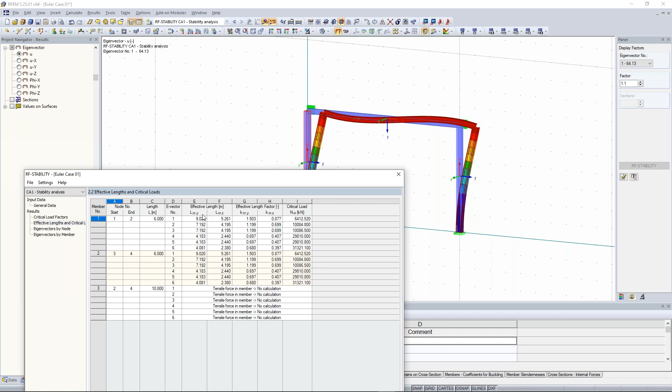Then you will get 9 meters, and 9 meters is this. Oh, sorry. Nine meters is this member length here. So you have to imagine that this is the member length here, something like that.

Yeah, I think this was everything. Bastian, are there any questions, or should I show something again? There's no specific question, but maybe you want to show us how you can create a joint in the beam, or a joint connection between the column and the beam.

In general, when you use the beam type, every member has a member type, and this is the member type beam. This means that every member is connected to the other one rigidly. So no hinges, stiff connections and stiff joints. When you want to add some hinges, like member hinge or also kind of springs, you can add here member hinge. Let's do that.

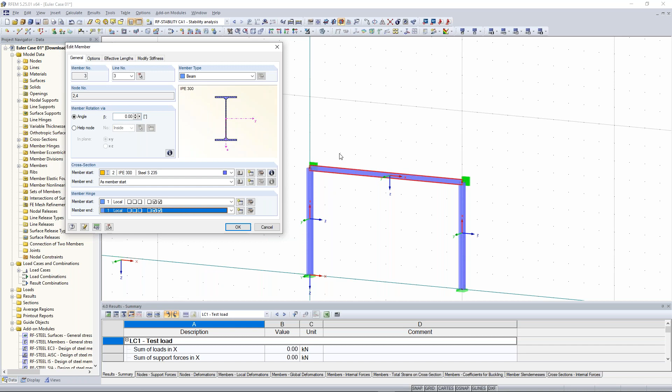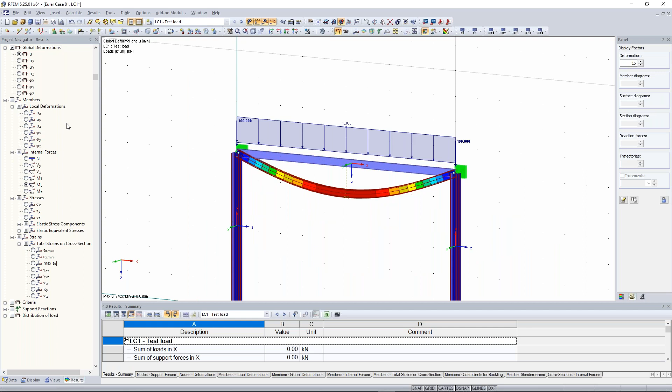So now you see here this white node, and now see what happens when I calculate it. Maybe concerning deformation. Maybe it would be better when I have a distributed load there, then you can see the results a little better. You see here the deformation, I think that's pretty clear, and also the bending moment. At both ends I have no bending moments.

And the same thing, when I have one beam which has on both ends member hinges, then I can create, instead of this beam with both member hinges, also another member type. I can create here this truss member type. We also offer other kinds of member types, but we come to those member types in the other parts of the training. So I choose here truss. Truss means that I have on both ends also hinges. I click on OK, remember the 125 kilonewton meters, I click on calculate, and you will get the same result.

Yeah, good. Bastian, any other question? No, you just solved the last question by using this truss member, so no more questions. Okay.

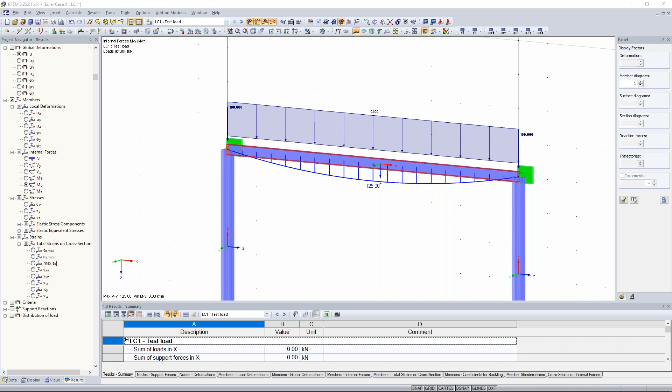Very nice. Now I have prepared the last question for you, Paul. Please answer me that.

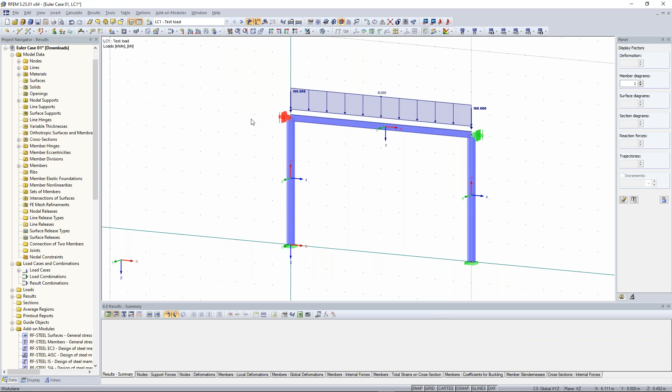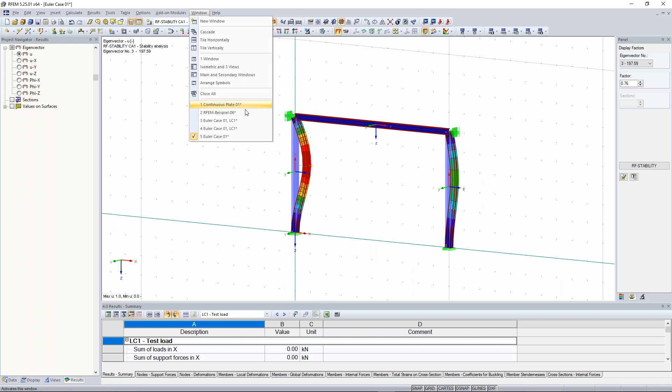Now let's jump to the continuous plate. There was one question, why we need phi X for beam hinge in the previous example. I think you mean this one, this nodal support. Oh, come on, this one I can tell you why. Because when we calculate it like that, the beam would rotate over its own axis, and this would cause an instability.

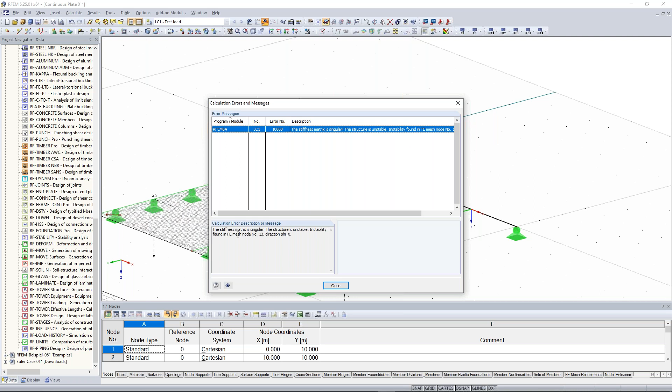I can show it to you, and therefore we have to close this directional deformation, otherwise it won't be possible to calculate it. The stiffness matrix is singular, instability found, structure is unstable, instability found in FE mesh node in the direction phi x. Therefore, we have to close this possibility of movement, and then it works.

Now the other question, can you model a two-way slab in 3D and compare it to hand calculation? We will do this in the other parts of training. And yes, today's training or webinar was free for students. Exactly.

So, Bastian, anything to add? Or do you have something? You were too fast. Sorry, Bastian. No, but I would say that we have everything. Do you? What do you think? Good.